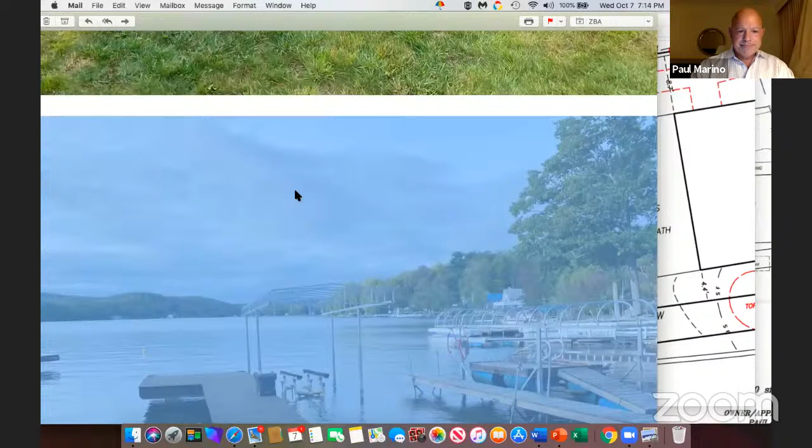Okay, this is another view. This is the dock. When we reverse the dock, we would be within the 5.5 feet in this area. And what I've done on this photo is I'm standing directly on the property line, looking out. As you can see, the neighbor's dock is...

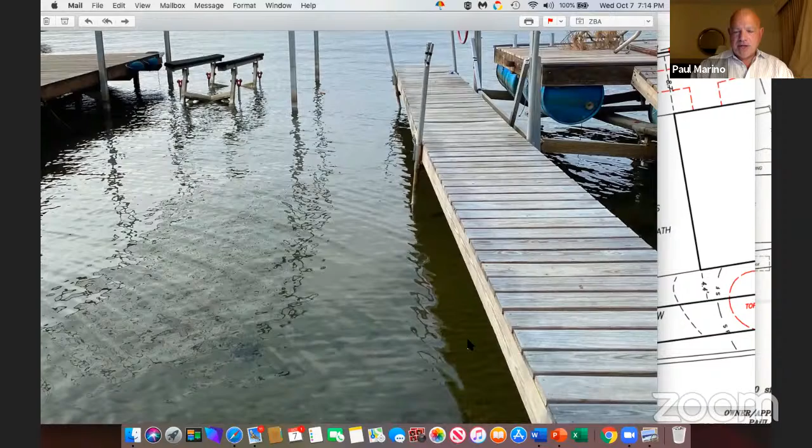Photo's blued out on us again here. Okay, as you can see, the neighbor's dock is literally on the line, has been that way for 40-some-odd years and is grandfathered in from what I understand. So with that, if he was within his 10 feet, we wouldn't be quite as on top of each other with this dock proposal as we would be.

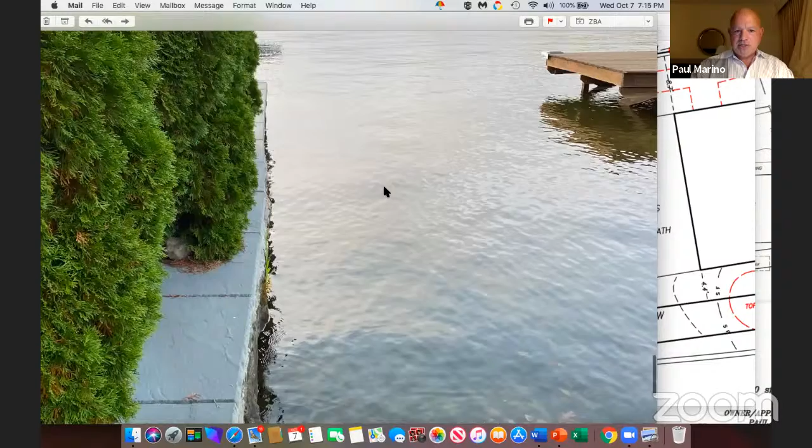And this is looking from my other property line out that direction. As you can see, there's going to be plenty of room here for the boat lift on this side. This is standing within the 5-foot section that I've leased, again kind of looking over at the dock. Not sure if those photos are helpful for you or not, but at least they'll give you some idea of what the waterfront area looks like.

In the meeting documents, we have an email from the neighbor on the side that will have the 5.5-foot littoral issue. He has voiced support for that, saying he doesn't have an issue with it, as you can see by this email that was sent to Pam this week.

So that's kind of a quick recap of the proposal. I showed you all this picture—unfortunately it's tilted, but this is looking up from the dock, again towards that 5-foot section that I have secured from the neighbor.

If you have any questions at this moment. So Paul, to clarify, you did secure a lease with the neighbor? You're doing a lease of the land? We have it, yeah, in fact I can pull that up, it's also in the documents. This was the agreement that Pam ran by the town attorney, and the town attorney has approved this for the purposes we're doing it for. I think you all have a copy of this agreement, I believe.

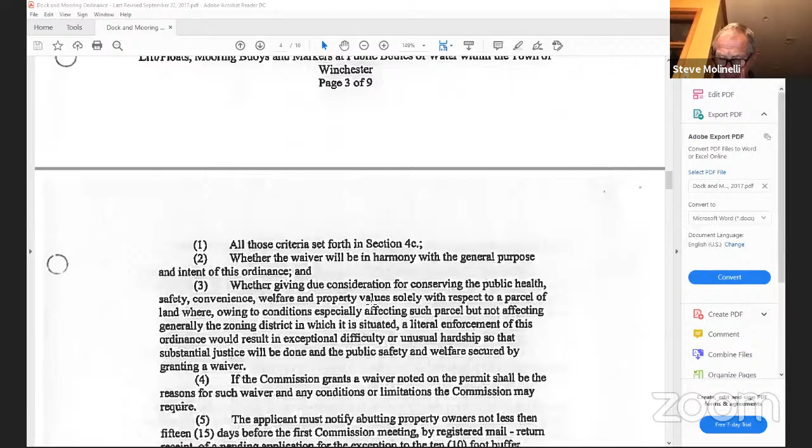And Pam, this is the ordinance we're looking at, or? Yes. So it's E. And what page is that on? That's not it, 3 of 9. I'm sorry, 4, go to page 4. Oh, I thought I saw E there. I was starting to read it, but no, it's 5, E. E5. I thought I saw 3 too, so. Where is it, Pam? It's E, but you want to look at the second page, page 4 of 10. Page 4 of 10, and where is it? The top.

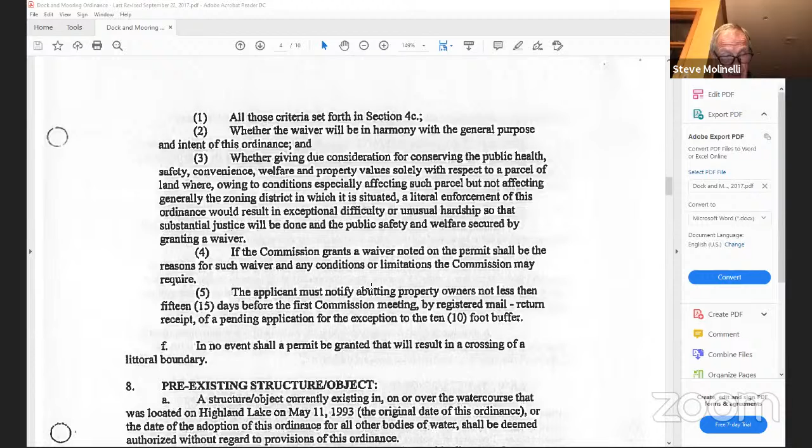So Pam, number 5 has been met. Does that make sense? Do you understand that question? Has number 5, item 5, been met? Yes, that's applicant - yeah, that's what you have to do whenever there's a public hearing. Right.

But did he make - he's not the same neighbor that mentioned that everything was okay. We haven't heard from this neighbor, right? Well, the lease agreement - Paul, if you want to speak to it, you have a lease agreement with one and an email from the other. The email is from the neighbor that would have the 5.5 feet littoral, and he said he's okay with it.

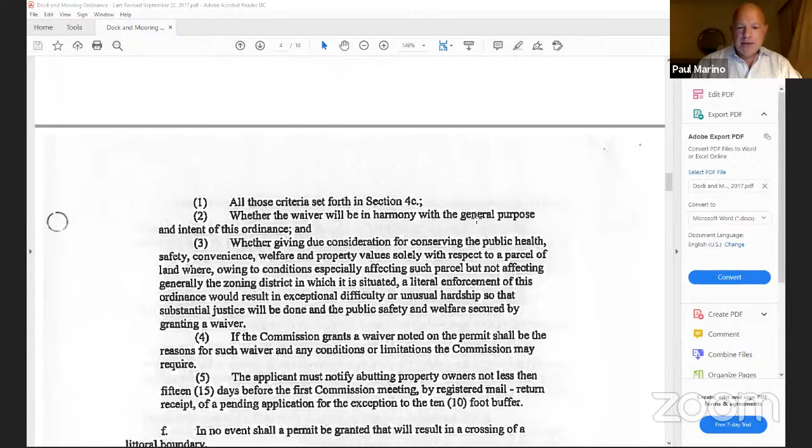Okay, and when I look at that, does it kind of go with the harmony and the general purpose of the ordinance? If you look at those pictures that I showed you, we are in a rather narrow part of the lake, or we all have fairly narrow waterfronts. And everybody, or not everybody, but there's a lot that are close to these littoral boundaries. Again, you've seen where his dock is located because he doesn't have much room on the other side.

Okay, no, I understand. I think that answers most of my questions.

Pam, yes, on page 2 of 9 of the ordinance, section C, the last section on the bottom, seems to indicate that the commission can take relevant facts into consideration in making a decision, and it includes the littoral rights of adjacent properties. So that speaks to the fact that we can rule on it and make a decision one way or the other. We're not obligated to uphold the littoral boundaries just because it's part of the ordinance. I think that's what it says.

It was always that if you had a, right, correct. These are the factors that you should consider.

Because my sense is, just to address Jackie's concern, even if the 10-foot dock were made back to just a straight walkway straight out, he would probably still be, to some extent, in the littoral boundary, not as much, but to some extent. It would be close. This section is about 5 feet, so I'd still be half a foot, give or take, within the 10.

And the neighbor is giving you permission to be there, basically. Correct. And again, he thinks it's an improvement, because right now the boat lift is over here and we're moving it to the other side, where there's more boat lift room. Looking at the picture, his boat lift is on the upside of the dock, right where you have the arrow circling there, yeah. Okay, you can see it.

You can certainly see it in this photo. He's got his dock on there now for the winter. Interestingly enough, his float goes out, and when his float is on, he goes out way past my dock, over the littoral boundary, and that's just the way it's been for 40 years. What you don't see in John's drawing is when his float is on, it's way out here, and it actually probably comes over to about here, which would never be allowed.

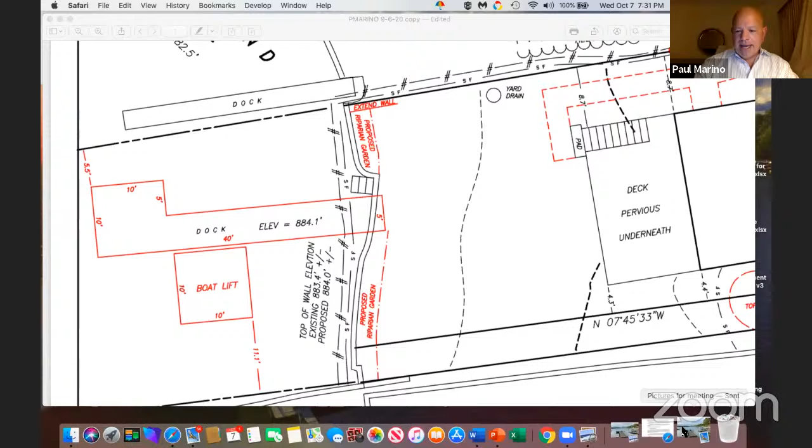Yeah, but again, I understand this was addressed prior to my buying the property, with Mike the owner, and they fought this for quite some time. Pam, you probably know the history, but he was able to keep his dock because he had pictures from the 1970s showing it was there. I think he had recently even replaced it and received approval, and I think that was when Steve Sedlowski was here. But we coexist in this situation quite well. I mean, that isn't what it's about.

I'd like to open this up to any neighbors or the public here as part of this meeting. Do we have any further questions from any of the other commissioners? Okay, well, that said, I'd like to open this public hearing up to anybody here, or any neighbors or anyone else concerned about this project or littoral boundary issues. Everyone has the ability to unmute themselves, so if you're here, you might want to speak up. Give them a couple seconds. No, I don't think so.

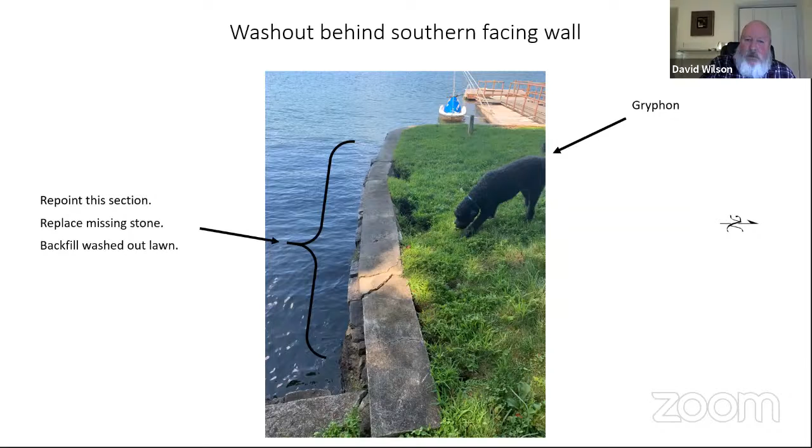So, repairs to seawall. My front lawn is disappearing into the lake. Most of the seawall is going to be repointed, other sections need to be rebuilt. So most folks have seen these pictures a couple times. What you see in this view is the section that is going to be rebuilt. The remainder of it will be repointed as necessary.

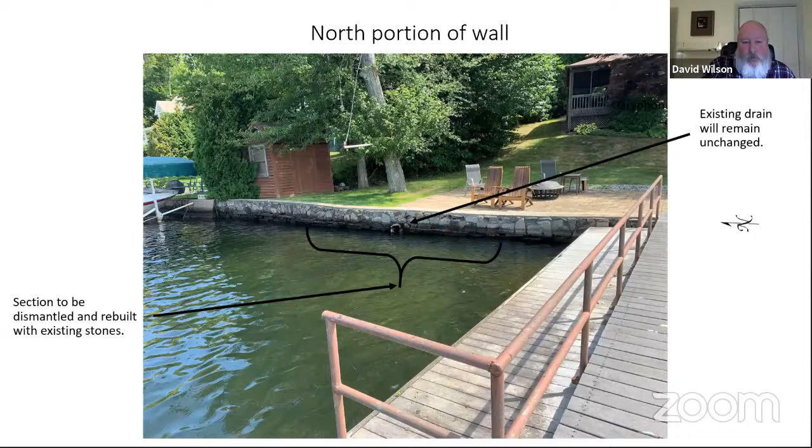The reason for the rebuild here is that the section we're pointing at right now is leaning towards the lake, and there's concern that it's going to fall in. It can't just be repointed.

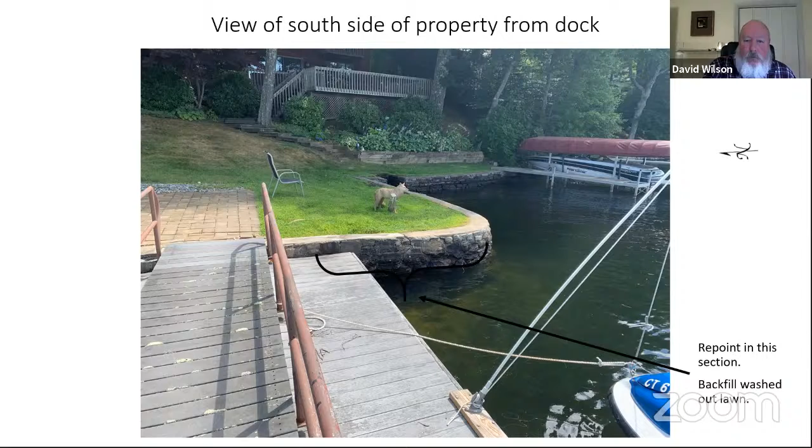In addition to that, the dock is sitting on a pier. The pier is crumbling away, allowing the dock to sink into the lake.

After I took out the seasonal floating portion of the dock, it was pretty apparent that on the left side, facing the lake, the dock is held up by two I-beams. The left I-beam is not sitting on a pier at all. It is very bouncy. The right-hand side appears to still be on stone.

So the idea is to replace the stone that has crumbled away and repoint as necessary for the pier.

This is another view of the dock showing how it is leaning into the water, roughly 8 inches or so.

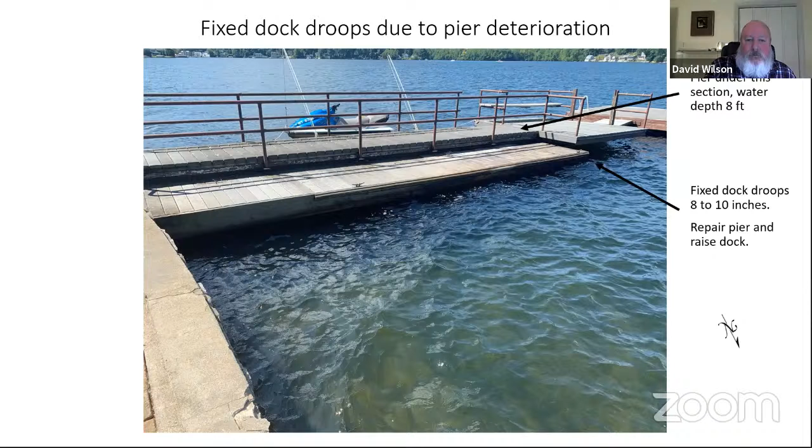It is a repair to the dock. I'm not changing it in any way. Same with the seawall—we're repairing it to its original condition.

When I looked at the dock, Dave, it appears as though there's an I-beam going across the dock from left to right, forming a T. Is that accurate? Yes, okay.

And the I-beam is sagging, basically, is what you're saying. Yeah, there are two I-beams down the central portion of the dock, extending out from the shore, and then there are I-beams that go across in multiple places. It is quite massive. We saw it.

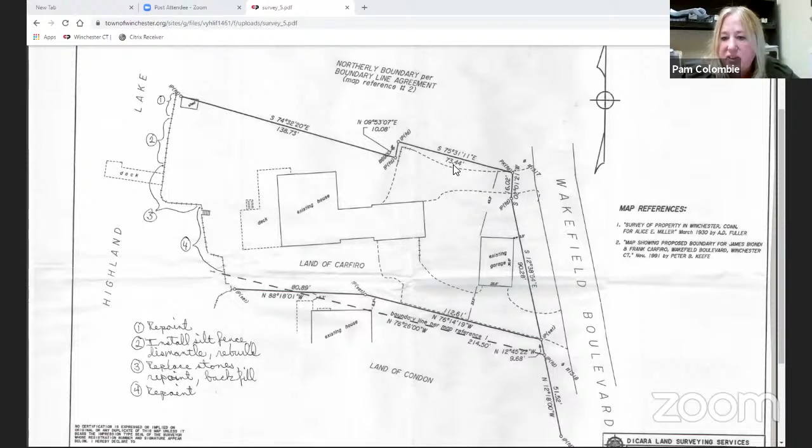When they come before you, that is the time. What was agreed upon, and where that grandfathering has come to be an understanding, is that there would be no enforcement until the time they're before you. It's been 25 years, and you can seek compliance or not. So before we argue about grandfathering, I'd like to point out a couple things.

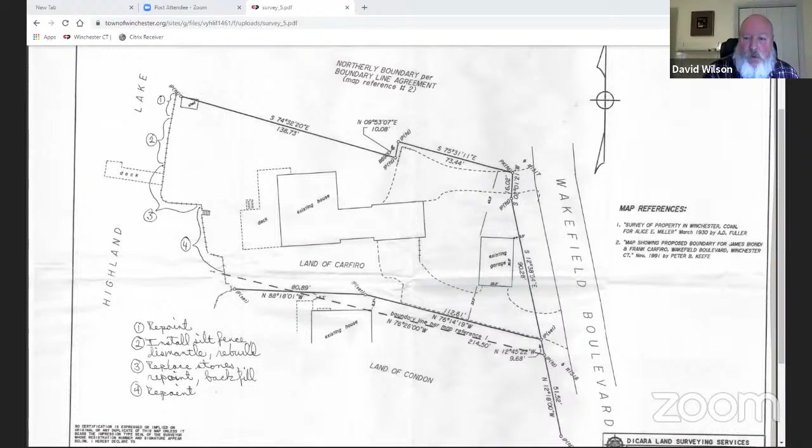This is a Shoremaster product, and Shoremaster doesn't even offer a 3-foot walkway—they start at 4 feet, and there's a good engineering reason for that. A 3-foot walkway, especially at 7.5 feet tall, is unstable and dangerous, particularly in third bay conditions where it's extremely wavy.

Is that why it has the wings on? Is that what you're saying, that it was to make it more stable? I'm not sure if I'm understanding this correctly.

Are we just talking about the 3-foot walkway that comes out over the water, correct? So this is a standard walkway adjacent to a boat lift. Okay, it hasn't been discussed at all in the past two meetings I've attended. This is a new issue that's been brought up, and I don't understand why, but it has. I'm concerned from an engineering and safety point of view that going to a 3-foot walkway is dangerous. I don't think it's appropriate in an 18-foot long walkway, 7.5 feet above ground level, to have a 3-foot width.

Well, I can't bring my 82-year-old mother out there. It's too narrow. Well, that's...

I have pulled up on the screen a question that was put before Attorney Kevin Nelligan on July 21st for this exact matter. I only bring this up now because you're talking about trying to gain compliance, and I understand there's a difference of opinion on it. Again, it's up to the commission.

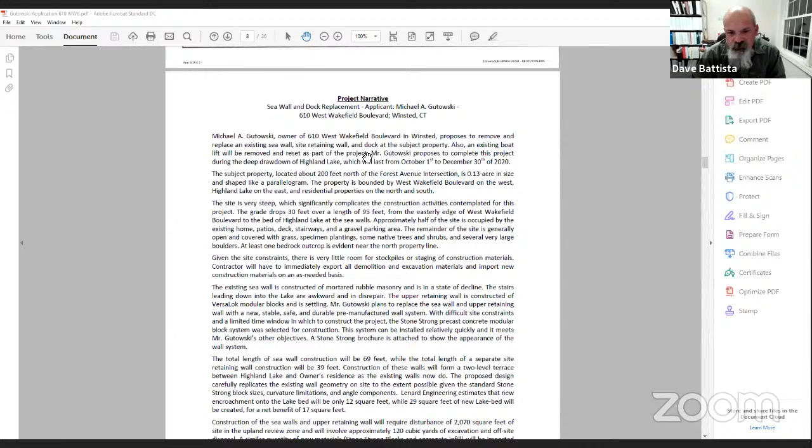Okay, so I just wanted to show you this narrative I put together on what we're proposing. I won't read it verbatim, but basically Mr. Gutowski would like to reconstruct his seawalls along the lake. There's another site retaining wall just uphill from the seawall that he would like to rebuild. He'd like to replace his dock with a brand new dock and reset an existing boat lift. We'll get into all that detail.

This particular property at 610 West Wakefield is located about 200 feet north of Forest Avenue. It's on a very steep lot that drops down from the boulevard to the lake—there's about a 30-foot drop. So when you're standing on the road looking at the house, you're actually looking down at the house.

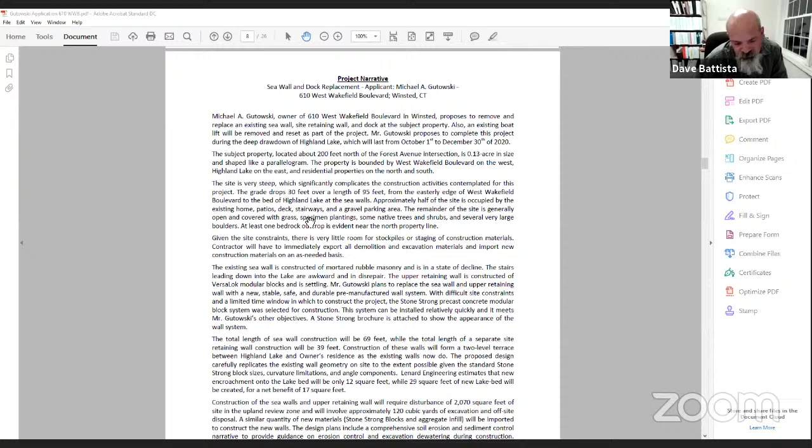It's a pretty steep site, and it's going to make construction very difficult. There's very little room to work here, so stockpiling is going to be a problem during construction. The contractor is going to have to use parking spaces and whatnot for stockpiles and staging of materials.

The existing seawalls are rubble masonry. I'll show you a picture in a moment. The upper retaining wall is a VersaLok, or modular concrete block wall, and it's not in very good condition. Neither is the seawall — it's sort of leaning and starting to fall apart, and he would like to replace them.

We are proposing to use a modular concrete block system called Stone Strong. I've included a lot of information on that in the application, and I'll show you some pictures. The benefit of using a system like this is it can be constructed fairly quickly, and as you know, we have a limited window to work here. It can also be constructed in cold weather, whereas cold weather may impact concrete if you were going to use that kind of product.

The other engineers I worked with on this project included a geotechnical, or soil, engineer that we brought in to help with the design of this system. He recommended Stone Strong, and we looked into it and thought it made a good product for this application.

The total seawall length is 69 feet — I will show you plans in a little while. The upper retaining wall is 39 feet long. Together, these walls form a terrace, a two-level terrace stepping up from the lake. The design I will show you carefully replicates the existing wall geometry as closely as we could with the components available through Stone Strong.

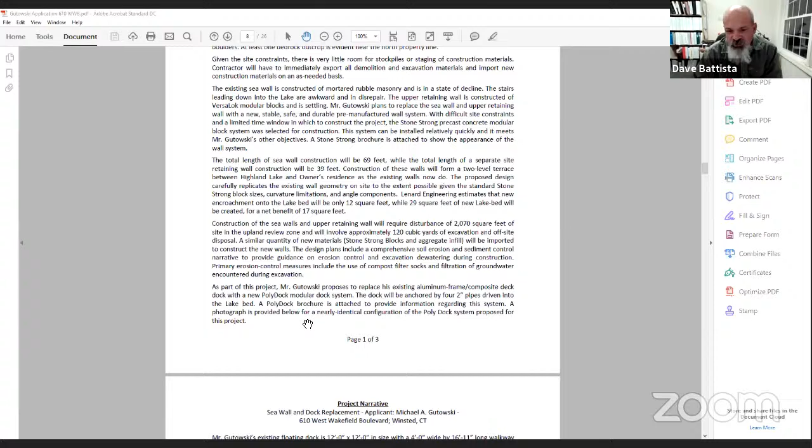About 2,070 square feet of site will be disturbed in the upland review zone. The work will require approximately 120 cubic yards of excavation. That material is going to have to leave fairly quickly — there's nowhere to put it on the site. And the new materials will have to be constructed and placed pretty much as soon as they arrive because of the lack of working space.

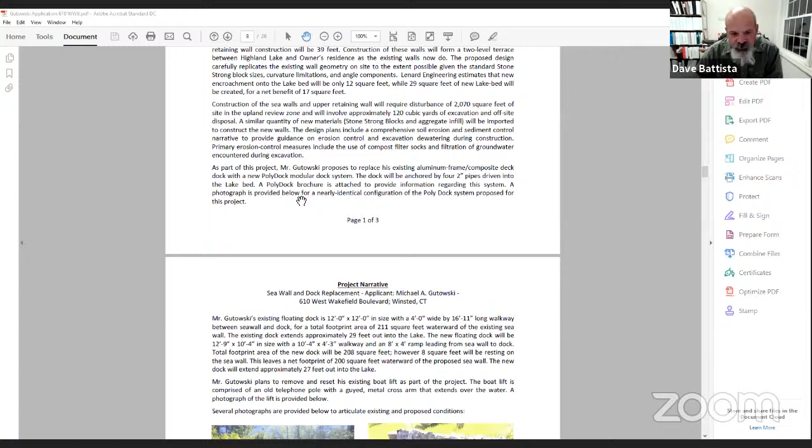Pam encouraged us to come up with a proposal for the dock to get it registered, and Mr. Gutowski would like to replace the dock with a new system called PolyDock. I attached a brochure to the application. His existing dock is 12 by 12, a floating dock that sits out in the lake, with a 16-foot, 11-inch long walkway that's 4 feet wide going from the retaining wall out to the dock.

That will be replaced by a slightly smaller dock system, 12-foot 9-inch wide by 10-foot 4-inch long, with a 10-foot 4 walkway by 4-foot 3, and an 8 by 4 ramp leading from the seawall to the dock. The footprint area of the new dock would be 208 square feet; however, 8 square feet of that will rest on the seawall, leaving a 200 square foot area over the water. The new dock will be 27 feet out into the lake at its furthest point, whereas the old dock is 29 feet out — so everything's getting a little smaller and coming in closer to the lake.

I've provided some pictures. The first one, on the upper left, is a view looking from the lake area up toward West Wakefield Boulevard. It's a very steep slope. This object you see here is the grinder pump, the sewage pump.

This is one of the two seawalls in question. It's kind of bulging — you can see it here. It looks to me to be somewhat thin in cross section, too dainty for the service duty at hand here. The wall we will be replacing it with is much more robust and more likely to stand up over a long period of time.

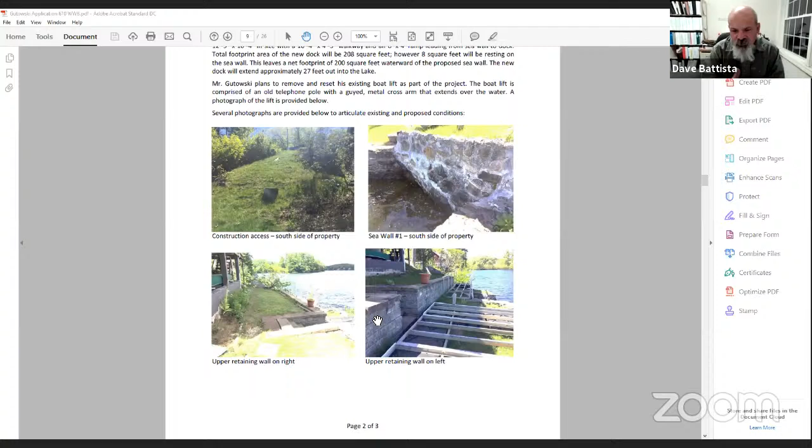The lower two pictures are the upper retaining wall made of VersaLok. If you were to look at this wall on site, it's kind of wavy and settling in places, and Mr. Gutowski would like to replace this at the same time.

This is another view of the seawall. You can see how thin it is. This particular wall is about 6 feet tall and only about 1.5 feet wide, so it's very thin and it's bulging—you can see a bulge right here. So it's time to go.

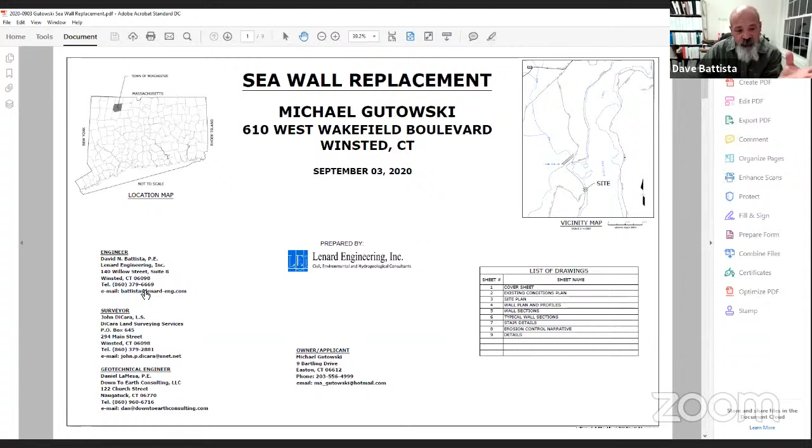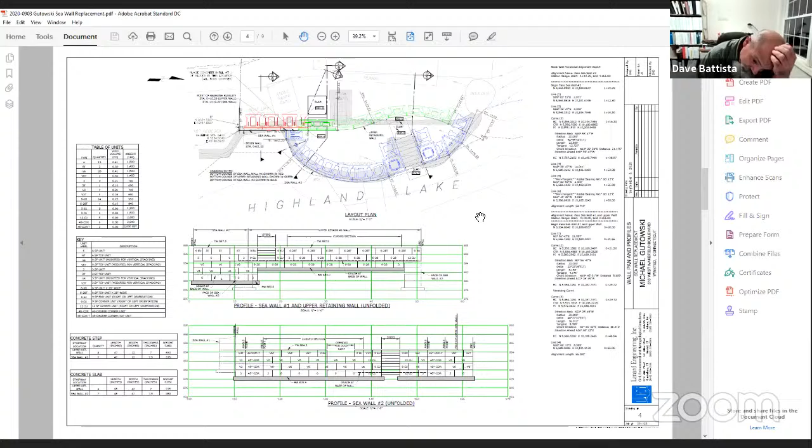Moving on, this drawing is more of a construction drawing, but it shows the thought we had to put into this. There's a lot of geometry involved so the wall goes together exactly the way we want. All the information on the right is survey information telling the contractor exactly where he has to put the various bending points and whatnot. If the contractor gets this staked out and pays attention to the stakes, the wall will go in exactly like we want it to.

I've drawn every block here for the contractor so he can see how they fit together and where they curve, and where the curves end and the flat or straight tangent runs begin. These views down here are elevation views, as if you were looking at the wall from the lake. We pretty much had to draw every block to make sure it all fit in between a boulder on the right and a seawall on his neighbor, Mr. Gutowski's neighbor's property over here. So everything fits nicely and should go in if staked out properly.

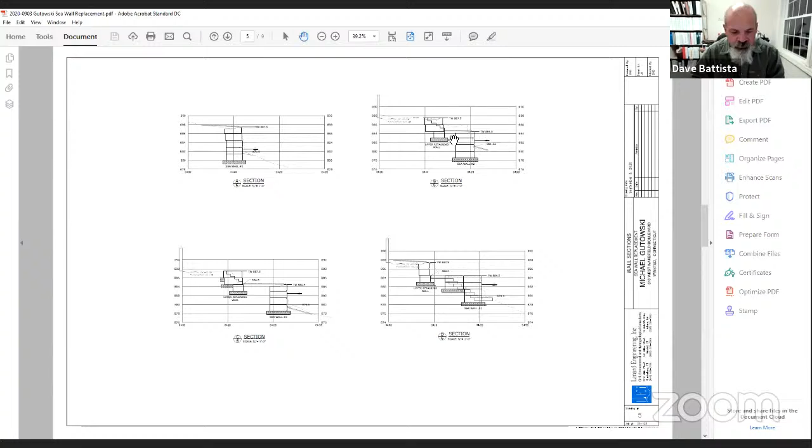One of the things I wanted to point out in this detail up here and the one in the lower left side, these are Mr. Gutowski's foundations for the lake side of his house. They do not go down in the ground very deeply. One of the reasons we brought in a soil engineer to consult with us is because we have to dig big holes where these walls are being constructed, and we wanted to make sure the front of the house wouldn't cave in as we dug for construction of these walls. The soil engineer cleared those issues.

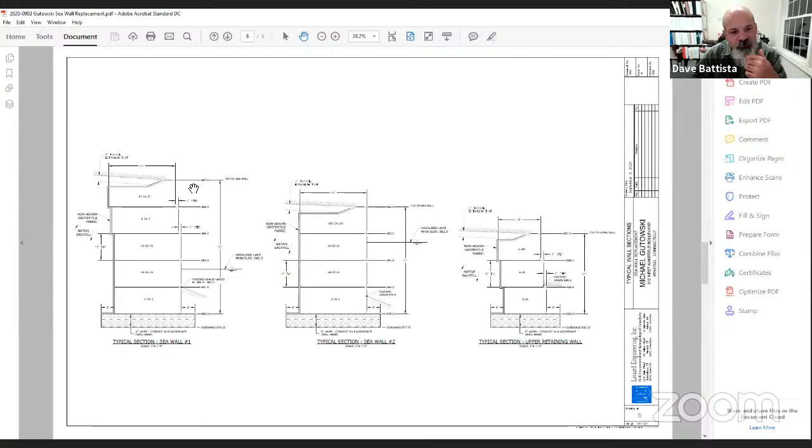These are just simply standard typical cross sections so the contractor knows exactly what elevation to excavate to. We show subgrade elevations for the various types of walls, and the elevation for the top of each layer going up. You can see how this lip is formed on the upper block to allow you to put topsoil right up almost to the edge of the wall.

Things will go much more slowly than they would if the contractor had all kinds of room. Because we have to move material out almost as it's being excavated and bring stuff in almost as soon as it's delivered to the site, it makes the contractor work with no elbow room whatsoever. So I'm expecting it to go slower than normal. I think it will go faster than 5 weeks, but we have weather factors and material availability factors to deal with, so I showed a 5-week sequence. As I mentioned earlier, the wall basically has to be built from the north end back toward the south end so the contractor doesn't paint himself into a corner.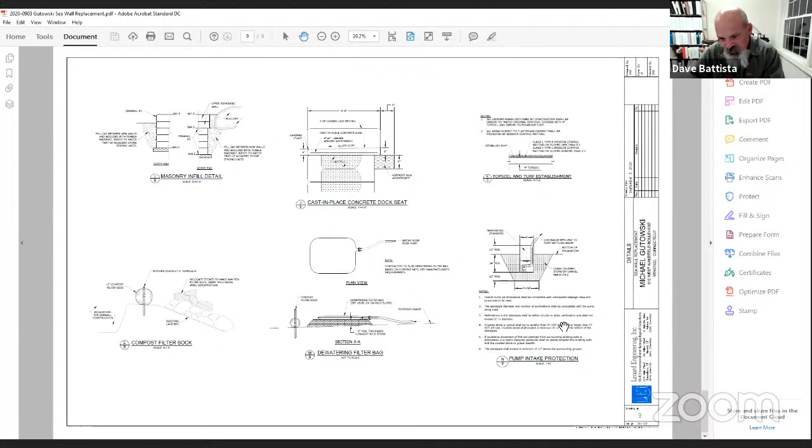At the ends of these concrete block walls, we'll have to fill in the gaps where our concrete blocks end and the boulder, or Mr. Gutowski's southerly neighbor's retaining wall or seawall starts. We'll fill that in with mortared stone built by a mason. I also show details here for pump intake protection in case the contractor has to dewater the excavation.

If we have to bring it back up, we can, just end screening and sharing. I'll do it for you. Okay good. And I apologize for going through that so quickly, but I know there are other applications, and I'll answer any questions you have.

But there's no material being stored on site, correct? Well, very little — I don't want to say no material. For example, when the blocks come on a big tractor trailer, the contractor will have to take them off fairly quickly; you're not going to be able to tie up a truck all day. Yeah, I was more thinking of soil being removed and stockpiled. The contractor may have to make small piles while digging and then have another machine come get those piles and get them out of there. There's just no room for big stockpiles here.

What were you thinking as far as tonnage of material removed? Do you have a rough estimate? How many tons of material do you think would have to come out of there? Well, I estimated 120 cubic yards of material. So depending on the material, that's probably at least 100 tons, correct? Well, probably a little bit more than that, probably 150. Okay, so you're rounding up from that. Yeah, okay.

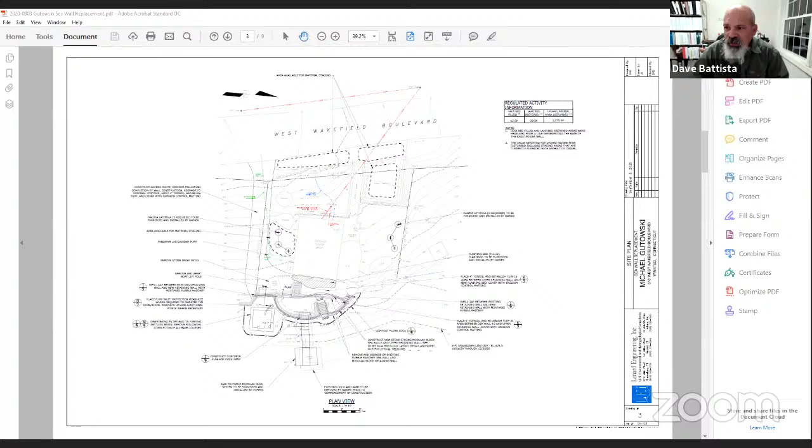Let's just go to the plans for a second. If you focus on the area of the docks, in light gray is the existing dock, called out with an arrow pointing to it, and in darker pen is the proposed dock. You can see graphically that the proposal is slightly smaller than the existing and a little bit closer to the shore when we get done. So I'm going to close that out and go back to the application.

Find it. Where we proposed. Go to your application, Dave. Yes, I just have to find it in my screens here. I don't know, it's towards the end. It's like the second. Yeah. Struggling to find it.

Well, you all have the applications in front of you, right? Yep. So the long and short of it is that the float at the end of the dock can't be wider than 10 feet to be in compliance, and the floating dock has to be 10 by 15 or less, maximum 10 by 15. No, the float at the end and the swim float, I think they can be up to 12 by 12.

Really? I'm looking at the ordinance now. Maximum dimensions for non-inflatable swim float are 10 by 10. Right, oh yeah, sorry, 10 by 10. Sorry, I was looking at the circular.

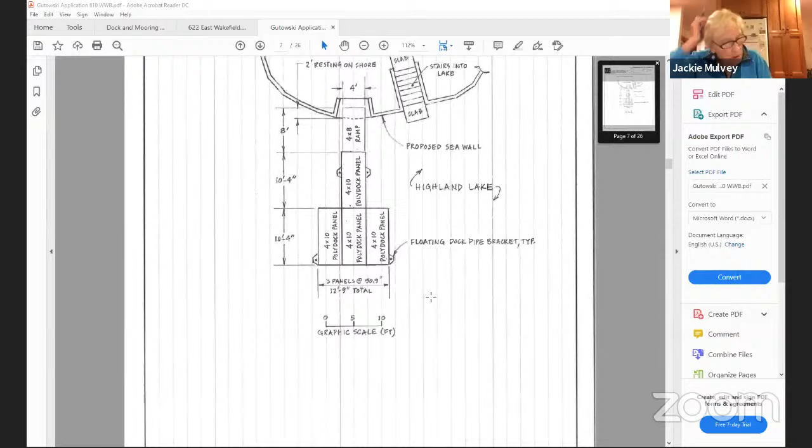So just quickly, what size does this dock need? The floating end part of it can't be bigger than 10 by 10? No, it can be up to 12 by 12 if I'm not mistaken. No, she just looked it up. Okay, I'm sorry, so you're saying that it is in compliance correctly?

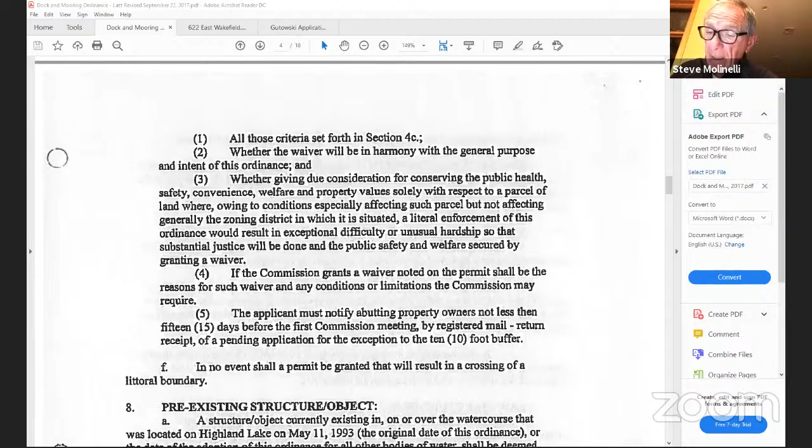I'm not sure, only because on page 5 of 10, maybe there's more to it, but: B, top of the page, the maximum total square footage of surface area for a dock shall be 320 square feet, maximum length 40 feet extended perpendicular from the shorefront, maximum width of a dock at any point into the watercourse shall be 10 feet measured parallel to the shoreline.

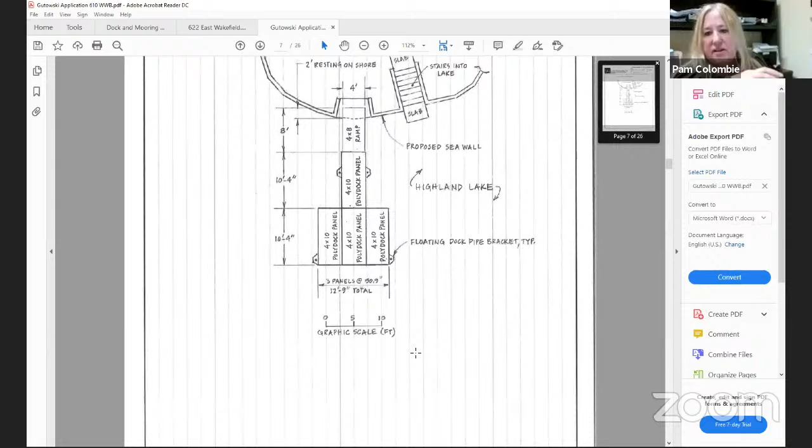So it seems like it's a width issue then. The length is fine going up, but it's a width issue, that 12'9" total. Yeah, really should be 10 feet. That's correct. I think what everyone does is that platform at the end of their dock, they call it a swim platform. Well, swim platforms are only 10 by 10 also.

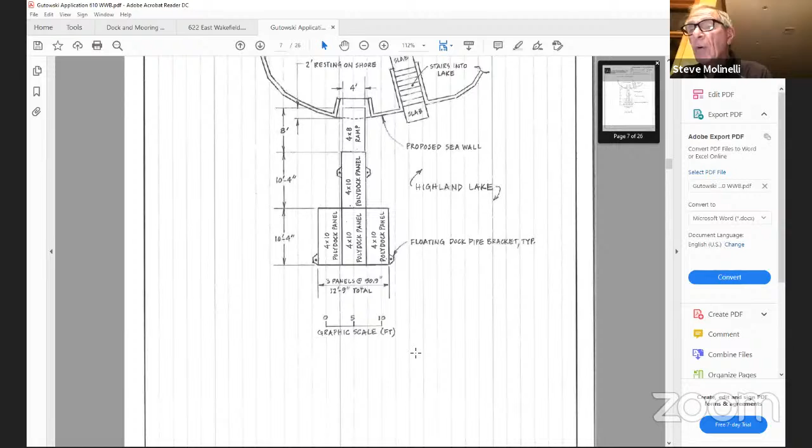My sense is, if the ordinance is what it is, the homeowner, I don't see making a big issue out of the width of that T at the end of the dock. Am I correct? Well, I mean, it's a new dock, so it should comply. It's got to comply. Yeah.

So are we in agreement that the end of the floating dock should really only be, according to ordinances, 10 by 10 maximum? Well, the width has to be 10, according to the ordinance. Yeah, the length could be longer as long as the total length between the ramp and the float doesn't exceed 40 feet. Right.

The width parallel to the land. The float, well if it's attached, it's part of the dock. Yes, but that affects the length, right? So right now, the length that they're proposing of the entire dock is 28 feet, that's okay.

It's the width that's 2 feet too wide, so they have to reduce that by 2 feet, almost 3 feet. The end of the platform can be switched around, so the 10-foot width could be side to side, and the 12-foot could go out further into the lake by another 2 feet, because the dock is modular, so it's how it's manufactured.

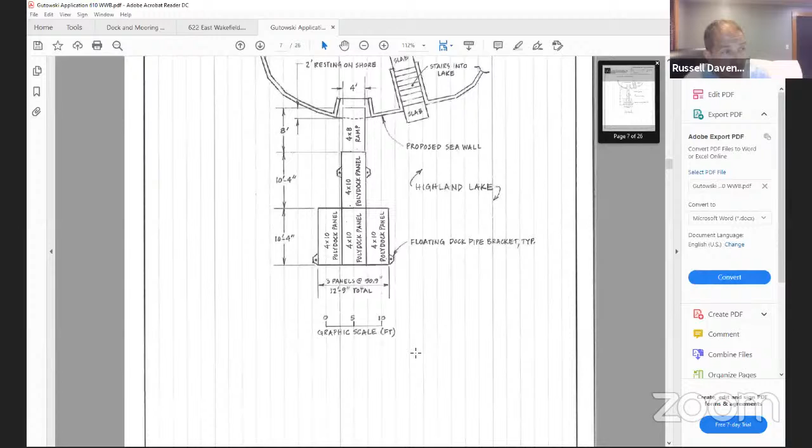Well, is it a dock or is it a float? Well, it doesn't matter, it's attached to it, so I think we're considering it a dock, correct? Well Jackie, he's asking for both. He's asking for a dock and he's asking for a swim float. Right, okay, but we're looking at the dock. Correct. And if a dock can only be, how wide can a dock be? 10 feet? Correct. Okay.

So if we turn this 90 degrees, it would be 10 feet 4 inches parallel to the shore, which is 4 inches in excess of your ordinance.

Right, the polydock system offers a 3 by 10 panel. So if you had 3 of those 3-foot panels, it would be slightly less than 10 feet when you look at the actual dimensions. Well, or you could have 4 of them and spin it and give him what he's looking for, which would be 12 by 10.

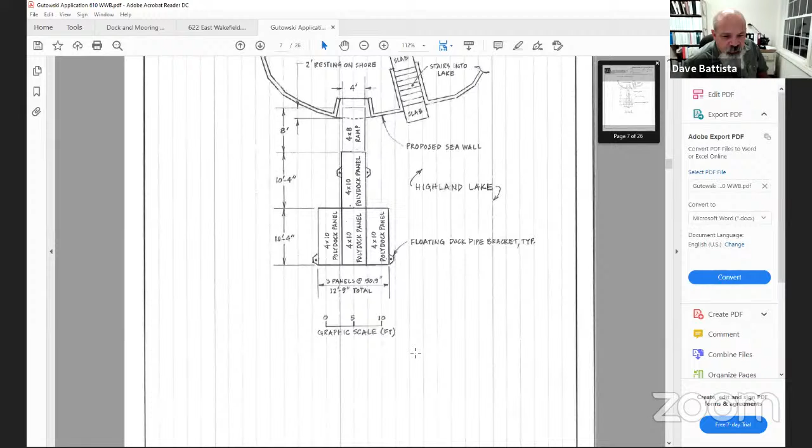So we were coming back on the 21st anyway. Can we revise this detail? Yeah, for sure. Okay, I mean it seems like it has to be done, but it almost seems quaint in comparison to the rest of the job. Well, we might as well get it correct now.

My suggestion would be, any configuration you're thinking of in order to expedite approval or us making a decision next month and not holding up the project, is to sit down with Pam and run by what your proposal is. If he submits the proposal to you ahead of time, I'll get that to you, and then we don't waste time at the meeting talking about it again. I think this is a quick fix, just spin it around and add another one to it if you're using the 3-footer, so you have 12, and it keeps it a pretty good size and you're done. It's just got to be on the application, that's all.

Can I ask a question about the Stone Strong systems? Do you guys know if anyone else has used this at the lake before for this purpose? I do not know. I know they're used extensively throughout the state, but I don't know of any directly at Highland Lake for this purpose, to basically be a retaining wall at the edge of land. Lippincott did, Jeff, Lippincott did.

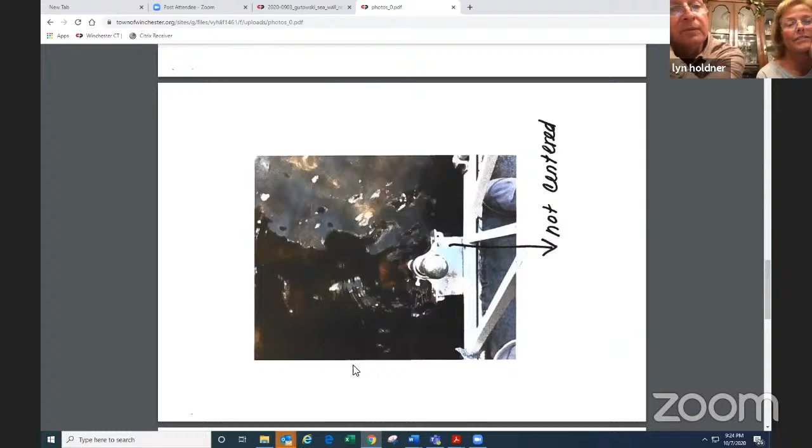Yeah, those are the pictures you're looking at now. You're looking down, standing on the runway, seeing how much the dock is out of alignment. It's up tight on one side, and it's not centered on the plate between the two vertical poles.

And we're also looking to apply to basically register this dock as essentially is, correct? Exactly. We never knew because the house was handed down from generation to generation. We never knew that even a dock had to be registered. So it was Pam's suggestion that while we were going for this approval, that we register the dock.

Guys, I think I need to recuse myself from this one because these folks are pretty close family friends of mine. Sorry, I'm gonna. No, that's fine. That's the right decision. Okay. Yeah.

I don't know, can we just approve this? I mean, we're talking about moving a block over.

Say that again, Pam? I'm sorry, I couldn't hear you. Yes, I mean, tonight we do have to find it as not significant activity, and you can approve it. Okay, I think we should.

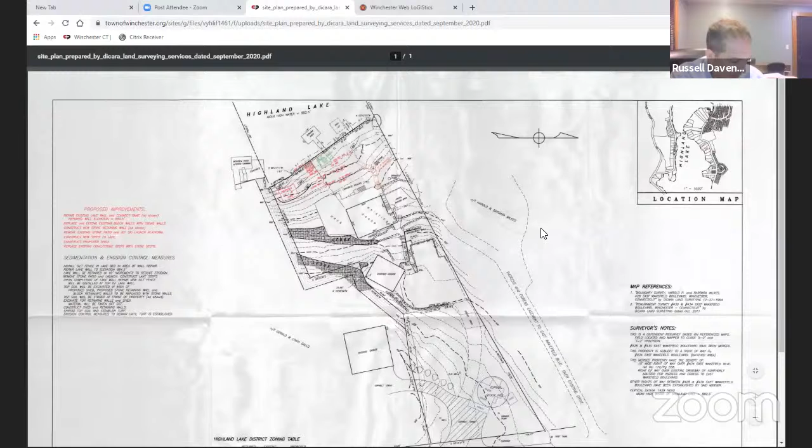The applicant is Don LaPointe, the owner Mr. Bates. It's 428 East Wakefield Boulevard, and we have a long list of repairs here: repairing a lake wall, jet ski launch, remove lakefront stone patio and replace with lawn, repair lake steps leading to water, remove 2 steps of concrete stones, extend lower block retaining wall, add a shed.

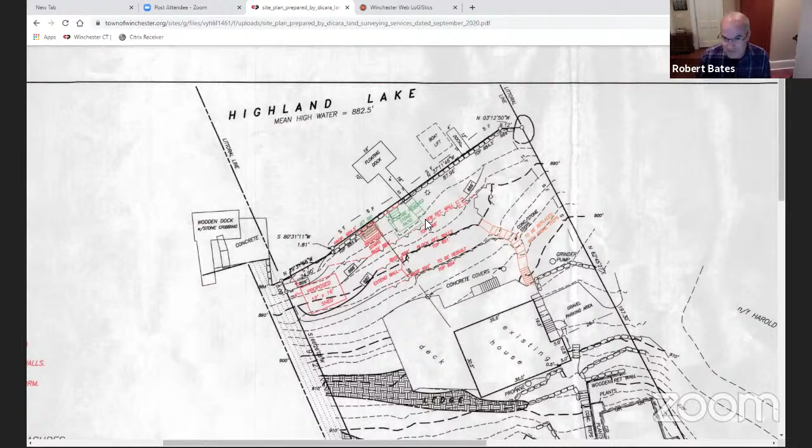There is currently what we're calling a jet ski launch. I don't know how long it's been there, it was there when we bought it. It's made of wood and concrete, and we would like to take that out. There is also an existing stone patio with some stairs going into the lake. We want to remove that stone patio, not rebuild it, not replace it, just remove it. With regard to the stairs into the lake, we do want to have some stairs into the lake. Ideally, they'd be moved over just a little bit and widened a little bit, but this is certainly something we're willing to do whatever is best according to you guys.

There's also, I see the diagram is up, some concrete and stone steps that are leading from the lake up towards the house. I think Don's father built them, but I'll let him go into that. With all due respect to Don's father, they're kind of uneven in height and they angle a little bit, so they're difficult in many respects. We just want to replace them again with stone in the same spot.

There are existing retaining walls. All we want to do is reface them. I think Don had something to do with those back in the day, and the integrity is fine. There's just some stones placed in front of them to face them, but we just want to remove and replace those stones.

Now, with respect to the retaining walls, I do have what I consider an erosion problem on both the north and south side of the property. If it would help with the elimination of silt flowing down into the lake, I will extend those walls on each side.

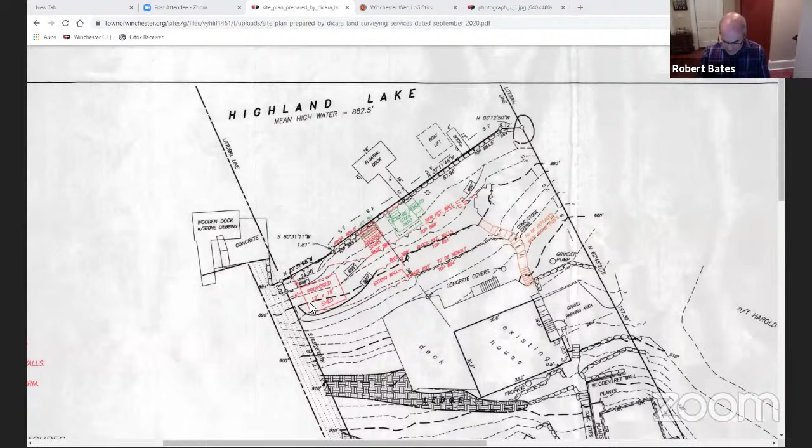Just real quick, met Don because we love it up there. Just last fall we bought the property at 430 East Wakefield. There was a condemned structure there, it was an eyesore. That's when I met Don. Don demolished it, and hoping that has helped improve the area a little bit. We have no intention of building anything up there.

I do have the cooperation of the neighbors on each side, and Don knows them as well. And that's really the overview.

What am I looking at? What did I just see that has a stockpile of soil? Can we go back to that?

This is a blueprint that was drawn up by John DiCara. I think Don can go into this with you in his discussions - that circle is over the house that was razed. I'm guessing, from what I've heard in conversations about other items on the agenda, that must have to do with whatever goes on in the course of construction. I forget the terminology you guys used, staging, or Don can tell you what's going on with the soil.

Because I can just say right now, we're going to have a topsoil pile that usually needs to have erosion control around it. That would need to be noted on this.

Don, are you there? Don, you got to unmute. Pam, can you unmute him? It's not showing that it's muted, but I can't hear him. He has to turn up the volume on his computer. We had done a test run before, so he's got the capability. I'm sure he can hear us, right? That's not your phone there, that 485 number, is it, Don? No. What I would suggest is that you call - do you want to call? Let me tell you what number to call, Don. If you want to call in on your cell phone, this way you can see. This will be quick, and in the meantime I'll share the numbers. He's showing you a number that he's calling - okay, so that is him. He held up the number for you. When you do it, because it's showing as muted and I've asked you to unmute, I think you might have to call back in. There's a menu, it'll say... Oh, it's so annoying, isn't it? He's saying call me, you can call back. Call him.

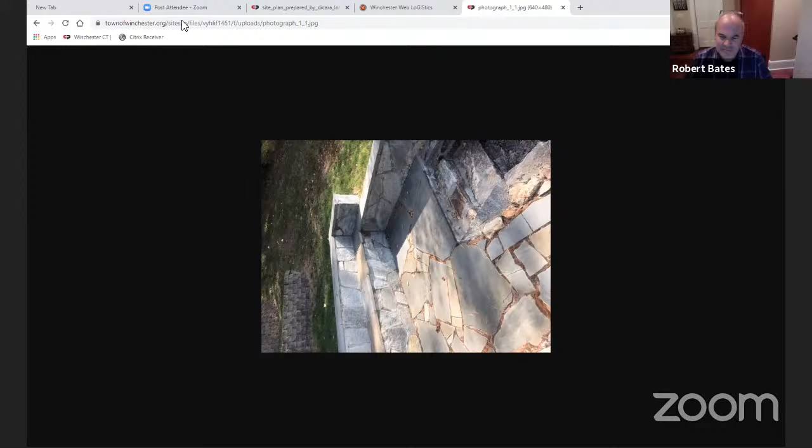And then there's... where did I go? Oh my goodness, Lord. Oh, I must have messed up. Oh, there's not that easy.

There's the step. Okay, the wooden structure you see there, it's actually got cement underneath it. That's a jet ski something or other that was there when we bought the property. We're just removing that and having grass and the seawall.

Hi Don, are you okay there? Can you hear me? Yes, yep. All right, let's go back to the site. You're supposed to hit star 6 to unmute yourself on the phone. I didn't know. Well, now you do. Now I do. Well, you know what, welcome to Zoom.

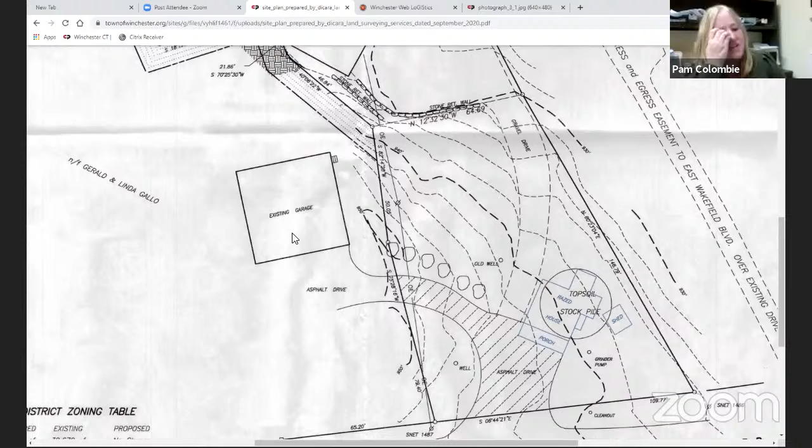Okay, so can you see the screen? So you want to guide us through this site plan? Yeah, let me, can you slide it up a little bit? I can't move it. Sure, so I'll probably, if I move it, the thing will knock me off.

But anyways, as Rob indicated, this house used to belong to my parents back in the 70s. So some of the work that was done here is all the work of my dad, who passed away about 5-6 years ago.

So anyways, the stairs that were done, if we want to talk about those first, they are not even at all. The treads are anywhere from, who knows, a foot to 4 feet. So they're very hard to walk up and down. The steps are anywhere from 6 to 9+ inches, so they're very not good. They're not safe, and take it from me, who has trouble walking downstairs. But anyways, they need to be redone, and they'll be done in a more unified, safe step and tread. They'll all be even. So that's one battle, but that's really not our foremost priority right now.

The foremost priority is to do the seawall. The seawall is falling into the lake, as the pictures I sent to Pam earlier today show. There's pieces of it that have fallen into the lake. So our job is to excavate the rocks that are falling in and get them back up on the wall.

We're not to go down to the lake bed at all. I think most of the rocks down on the bottom are good. It's probably the 2 to 3 feet from the top that are pretty much loose, not plumb at all. They're all half falling into the lake, or they're not even. They just need to be all straightened up and repointed with different rocks. And also the level of it goes up and down all over the place.

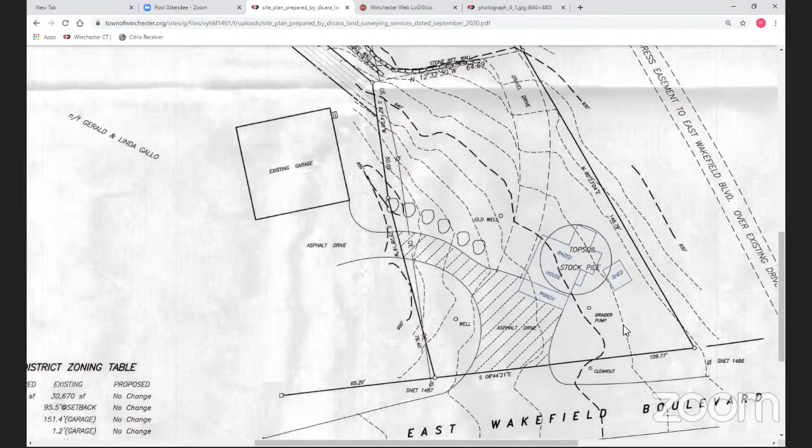So if you have any questions, I'll be glad to answer them.

One thing I'd like to see for our next meeting is more detail of these upper walls. The homeowner mentioned there was erosion occurring there, and maybe more detail of exactly what was going to be done, with the extension of the walls and potentially other erosion control methods up there - not for the site of construction erosion control, but once that wall is completed, or if they're being extended. It's hard for me to see what the scope of work is on the upper walls.

Well, most of the erosion is up top, not on the bottom. It's coming down between the Wilkes property and Rob Bates's property, because of the driveway and everything coming down that area - that's where we're getting a lot of drainage from the water. Water runs downhill, there's nothing you can do about it other than try to maintain some kind of growth. We could put bigger stone there to try to diffuse it a little bit, but the water is coming down the hill. As you can see from the topo, everything is downhill.

There is grass there now. It doesn't grow as thick as you would think it would on a nice lush lawn, but I think carrying it...

To back up a minute, those two retaining walls that are there, they were there when I did those back in the 70s - actually early 80s, I think we did those. They were made out of 6x6s. What somebody did prior to Rob Bates buying the property is they faced them with a decorative block, covering up the 6x6 timber walls with a block wall. Rob doesn't like the look of the block, and probably doesn't like the look of 6x6s either, but those walls have been there over 40 years. So I'd say what he wants to do is reface them with something with a stone look. He's trying to make it look more unified with the lake wall, trying to make the appearance look better.

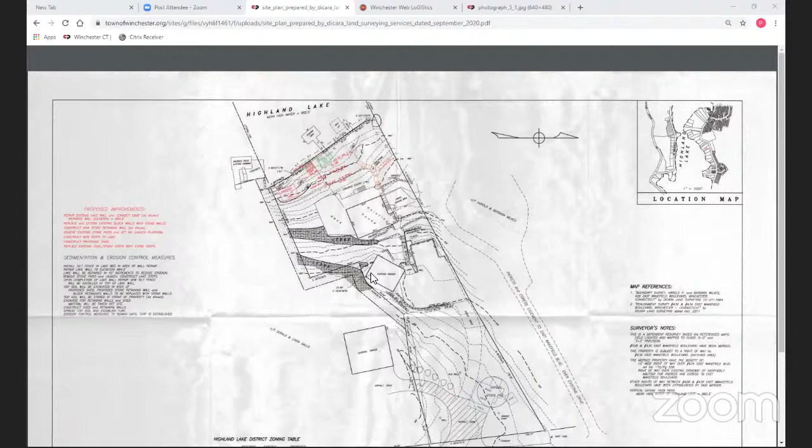And the other thing is it's very steep coming down there, so by us continuing those walls, it does allow us to have a little bit of areas so it's not so steep. It steps down a little bit, so you don't have all that steep slope going all at one time. So that's basically the main purpose of the walls - if anything, that's erosion control.

Could you repeat that? I couldn't hear you. Drawing. Where is the shed? It's here, right in the corner. Oh, there, okay, I'm looking at the wrong piece.

And we do plan on all the appropriate landscaping.

Hey, Don. Yeah. Yes, Steve.

Just to be clear, you keep saying you're only doing the lakefront wall. But if the application includes work on tiering the property and fixing the stairs, then Russ's point is we need more detail. If you want to remove that language and just repair the lakefront wall and stairs, you'll have to submit another application down the road to do what the homeowner would like with the walls.

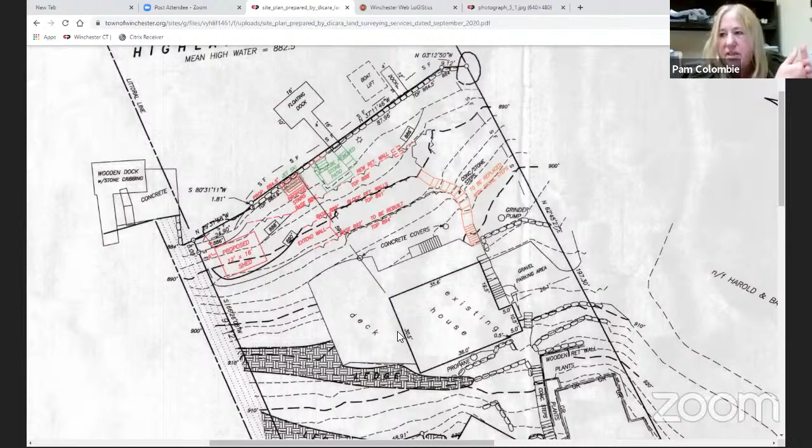But you can reface these walls without taking them out—so you've got timbers, then block, and then you're gonna put more block? No, the timbers are gonna stay there. The block will come out that's in front of it, but we'll just reface the front of the timbers with new stone.

That make sense? Sort of. I mean, like I said, we need to see a plan with more exact detail of all of these. Some of this stuff's easy, like removing the jet ski launch and the patio, but the concrete steps, the retaining wall, the moving of that, and the re-excavation around the shed—we're used to having a bit more detail, which I'm hoping you can provide for our next meeting.

What do you want, a cross section? Yeah, we want cross sections and as much detail as you can get us, so we get a really clear idea. Probably a sequence plan. Yeah, there's a sequence plan on the side of the drawing—it's all a sequence of events. John and I discussed that prior to him putting it down in the plan.

So as far as the detail for the wall, yeah, I could bring you a detail for the wall, which is not a problem—to extend the wall is what we want to do. As far as the jet ski lift, that's already pictured. Pam, did you put up that picture of the jet ski lift? Yeah, that's not an issue. I can see to take that out, and I don't need any real detail on that.

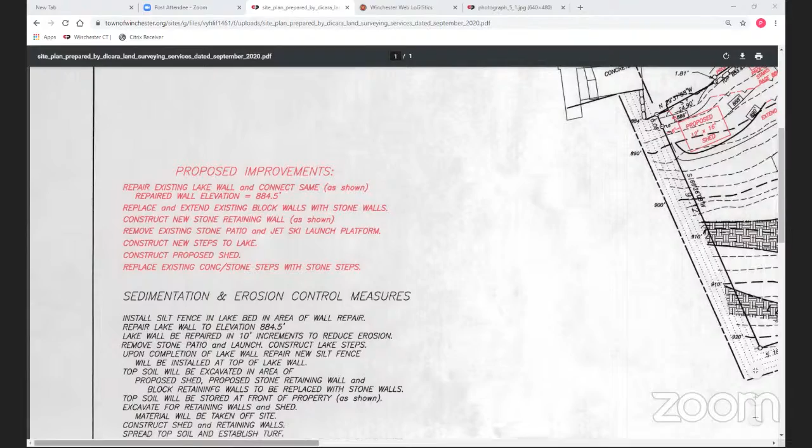Don and the homeowner, the first thing you're asking for is to repair the existing lake wall and connect a repaired wall to a different elevation, that you talked about, and replace and extend the existing block wall with a stone wall. Where is that block wall? That block wall refers to existing retaining walls on the property.

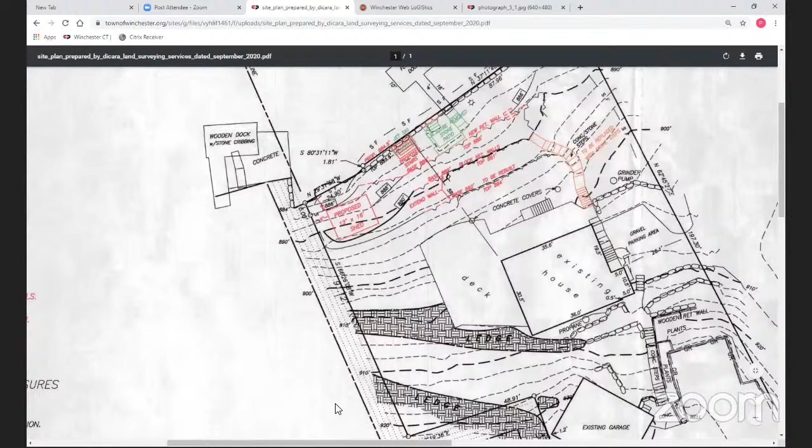Okay, that's up there, so you're doing more work than just the lake wall. Go back to the picture. Then you're going to construct a new retaining wall, and that's the extension you're talking about? Correct. Okay, can you go back again, Pam?

Remove the existing stone patio in the area we know about, construct new steps. Now, that's all in your proposal now. Right, and if you're not going to do those things, then—

I didn't say we're going to do that, Steve, that's not what I said. I said we're focusing mainly right now, but we want to get the seawall done, obviously. The rest of the stuff is probably not going to get done between now and December 1st. Well, the rest of the stuff is up from the wall, so whether you have a drawdown or not, you don't need a drawdown to do any of that work. It's all on land.

We want to do the rest of it. But what Russ is saying is we need more detail on what you want to do on the land. That's the easiest way to say it. Yeah, I got it, I understand what he's saying. So I will give him detail for the walls we propose to put on the land.

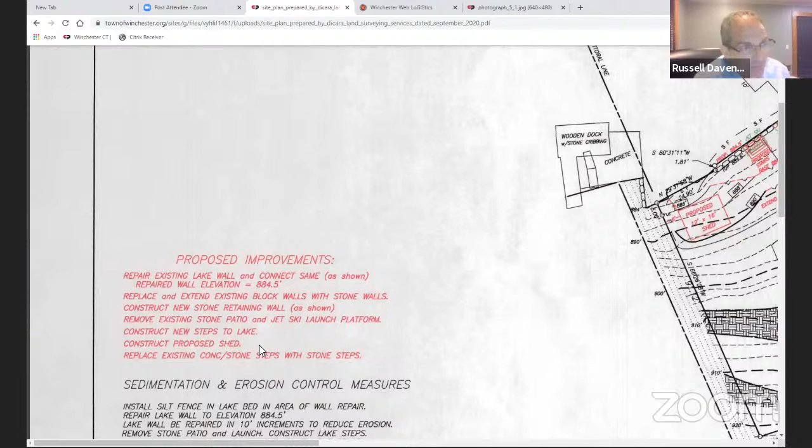Yeah, that's what Don said too, with these plans, the more we can see, the better off we are in moving ahead with an approval. Even if you don't think it's that important, the more you can add, the better off everybody is in understanding the scope of the work. I know it's more work on your end up front, but that's what we've been requiring and trying to move ahead with everybody on.

The walls are approximately 3 feet tall, not more than 32 to 36 inches. So they're not engineered walls, just more of a decorative wall holding back 3 feet of water, 3 feet of dirt or less. I'll put up some kind of cross section design for that wall and give you that for the next meeting.

Any cross section, exact measurements, lengths, more pictures would be beneficial. Okay, no problem. So if you're voting to accept this tonight, you have to find whether or not it's significant activity. I don't know if the commission's interested in visiting the site. We would. You're welcome anytime.

Thank you. I have a concern, I'd like to see a buffer zone. Say that again, Kurt—a buffer zone? The vegetation riparian buffer zone. Yeah. I didn't see that on the map, so that's the suggestion I have.

I'm sure you can elaborate on it. It's a 2-foot buffer zone. Yeah, Mr. Bates and Don have been requiring a vegetative buffer between the grassy lawn and the seawall. Okay, well, I'm looking forward to that to keep the geese off the property.

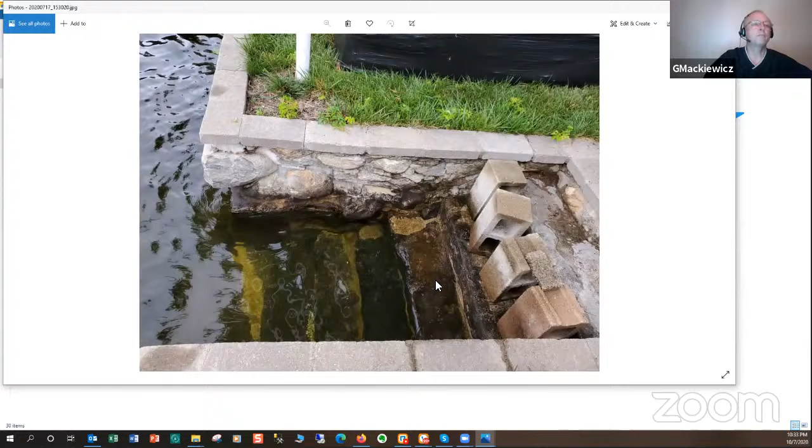So our goal is to bring the wall to more true to the lake, in a sense that right now it is field stone for probably, let's call it, 60%. The other 40% plus is that block that is, again, a landscaper block.

This picture is just showing you a cross section here, where all under this rock where the fieldstone is, it looks like rocks have been falling out of the bottom of the wall for many, many years. The rocks aren't there anymore, but it is literally undercut. And the wall has started to bulge, as you can see in a number of different areas. Specifically here, where I'm the cursor, the wall is literally falling.

This is the landscape portion, and it's about 8 inches recessed in this area because the wall is literally falling forward. There was no engineering done whatsoever behind this. Usually you have to design it with what they call a battered back, but none of that was done at the time.

In talking about the dock itself, it's a wood dock that is on a pier, and the pier, you can see from here, is in very, very good shape. The problem is that it was never built properly. This is a picture from underneath the dock, and again, this is a better picture to show the wall coming forward, and you can also see the face of the stone there.

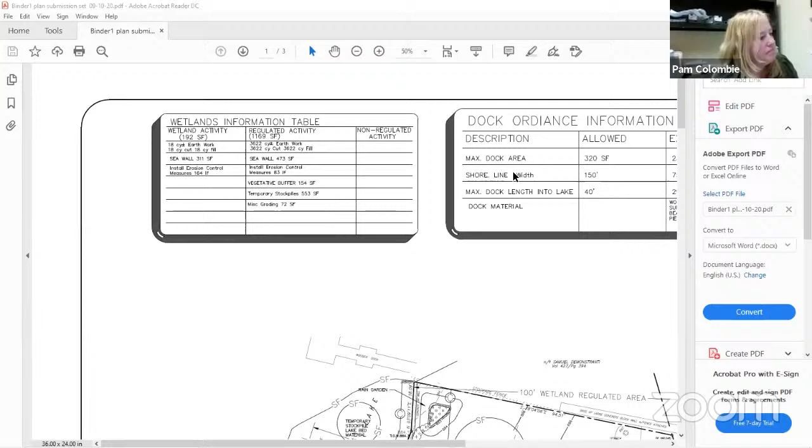Okay, on my screen now I have a wetlands information table to make your job a little easier, showing our impact in the wetlands and our impact in the regulated activity area. I also put up the dock ordinance dimensions in the other corner. Let me slide that over so you guys can see it.

So what George was trying to say is that he's allowed 320 square feet for his dock. His existing dock was 235; the proposed one will be 264, a little bit bigger. His shoreline width is 75 feet, and the maximum dock length into the lake allowed is 40. What he presently has is 29.4, and he asked us for a 40-foot long dock, but we couldn't do that without getting the diving board effect. We increased the beam size from 3.5 inches to 8 inches to give him a more stable platform out there.

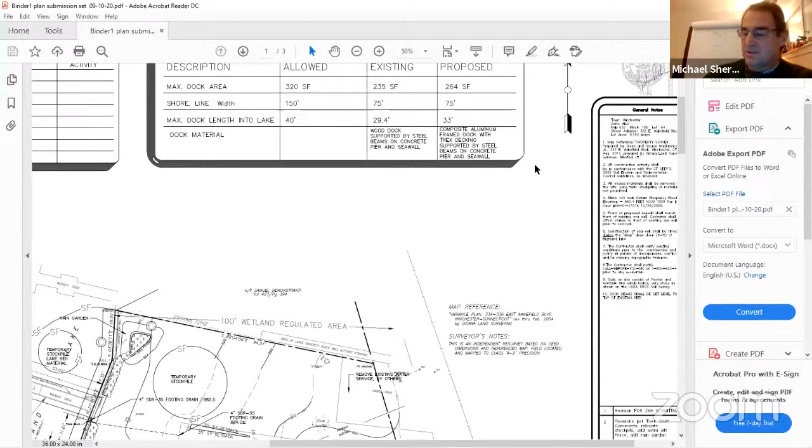When we went to design these beams, that was a bit of a challenge — it's basically designing a bridge. So we had to adjust the seawall to form a small abutment, which we call a dock abutment. That's in our details in the sheets below. Here's an elevation view of the dock abutment.

Right here is where the dock will sit into the wall. We have the 8 inches for the beam, and that framing and decking for the aluminum deck was another 4 inches. So George will have one step down off the back of his wall into his dock, and he'll now have an even dock. And we have another elevation view showing the dock going out into the water.

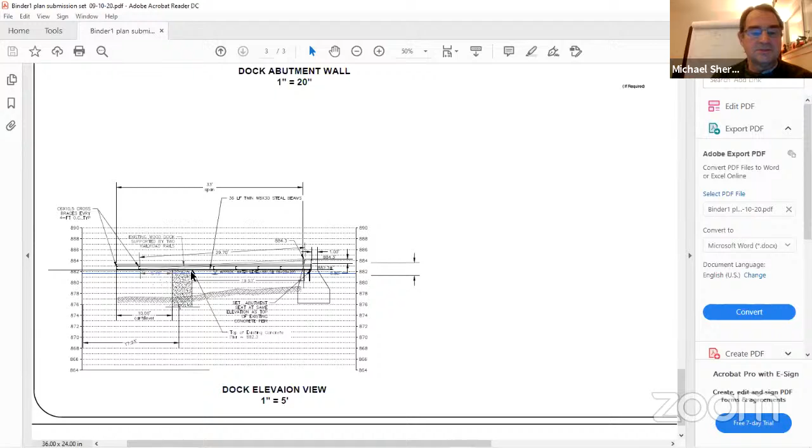Here's the existing 4x4 pier, and we will be sliding these beams over here. When you do a bridge design and you have beams, you have to plan for thermal expansion and contraction of the beam, so you have a fixed end and a loose end. The loose end will be over on the pier, and we'll have to make modifications to the existing pier by adding a keeper block to the top. It'll be basically a block of concrete in between the two beams, so if something hit the dock from the side, that would keep the beams on top of the pier and they wouldn't slide off.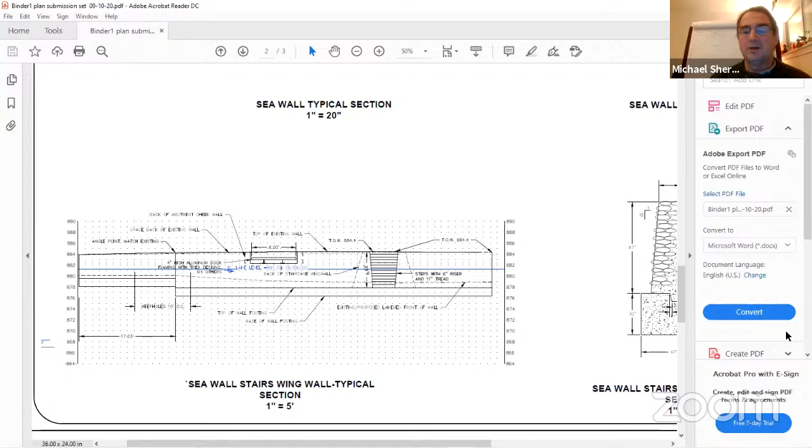This cross section here is for the seawall at the abutment. The retaining wall that we put in is based on a gravity wall, and so we have a wide batter in the back that'll keep the soil pressure pushing down on the wall. And then we have the gravity of all the massive concrete and stone here that will keep it from sliding out into the lake. The existing wall right now had too thin of a section and it's turning over, and so I designed this wall to meet Brian Dwyer's concept of how he wanted to build his stone retaining wall.

This is all to be mortared stone in the front, and Brian could explain this to you best - he has some pictures of how he did this before. What he likes to do is make the stone masonry wall, then fill the core with concrete. All we're asking Brian to do is keep to these dimensions, because we know that for a concrete retaining gravity wall, this will be stable and it will last George's lifetime, that's for sure. We won't be back doing this again.

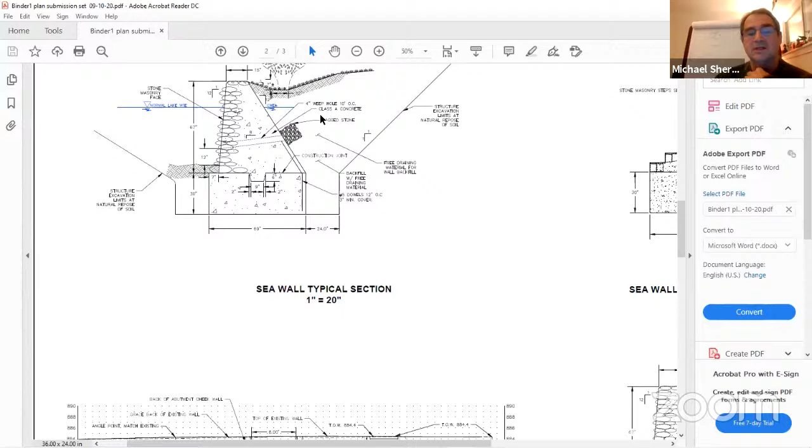We've given you several cross sections through here. We want to rebuild the steps, and I have a cross section of the steps to show that. If I can get it to hold there for a second... there we go, I have a little trouble with my screen here.

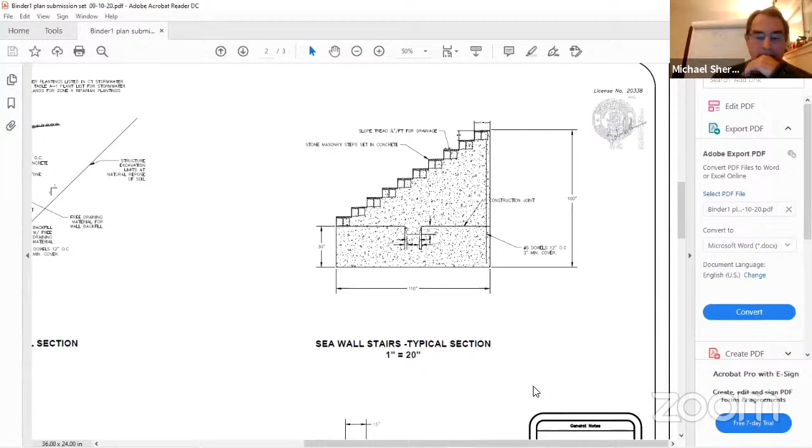The steps are going to be done in the same manner as the wall, with all stone masonry going up the steps with a concrete base underneath it. I'd like Brian to discuss how he's going to build the wall, and he can give you the sequence of construction.

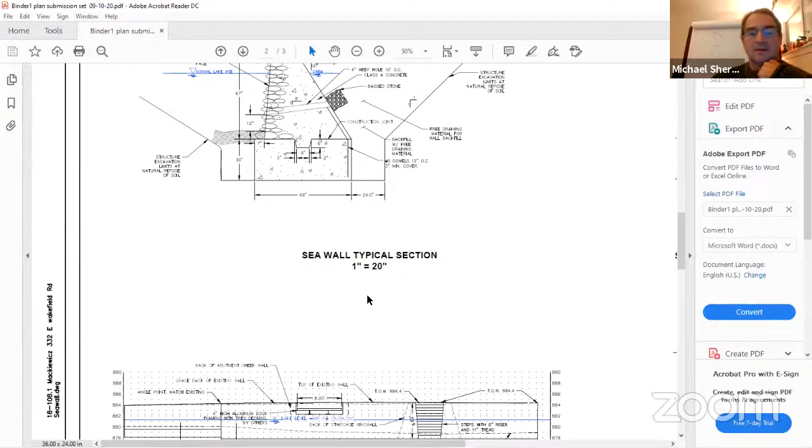If you're still here, Brian. I don't know if we're still here. Past his bedtime, we're still here. Okay, hi Brian, how you doing, Mike? Good, I hope everybody's doing well out there, and thank you so much for staying up with us.

Just to expand on Mike's points, it won't be totally concrete. We're going to be lining this with 8-inch masonry blocks, cementitious masonry units that are rated for foundations and below grade applications. We'll be using masonry cement type S as well as bagged concrete coming in at 5,000 PSI, and we'll be filling the core with rubble and concrete, and there will be rebar involved.

That rebar will probably have to be coated, right, Mike? I would imagine for rust purposes. Anytime you use rebar in a marine environment, you should use epoxy coated.

Yeah, absolutely, I agree. So we noted that there's the landscape block wall on the northern side of the property, and we'd start our excavation there and do it in 15 or 20 foot sections, replace that, take down the next part, replace that, after all the silt fences and all that, of course, and work it down like that.

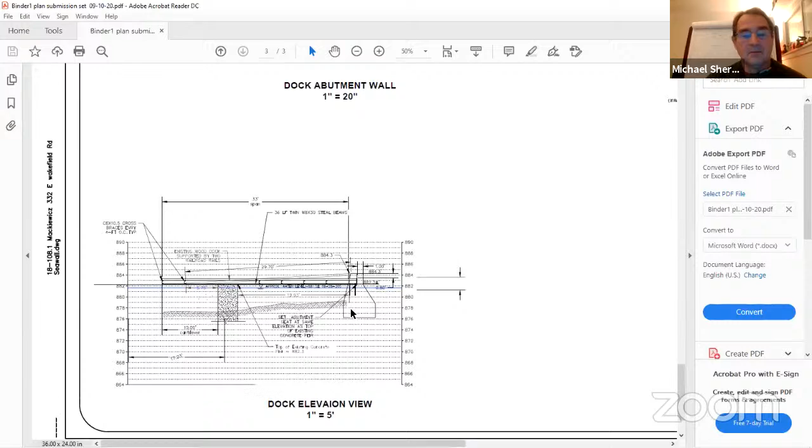Oh, I did want to mention dewatering. Yep, because the foundation we show, the wall is only 30 inches below. If we go over to my cross section here, with the 8-foot drawdown, I believe the water level will be below your excavation and we won't need it. But if we do need it, we will just follow all the guidelines in the sediment erosion control basin with pump inlet and outlet protection for it.

The outlet protection consists of a 55-gallon drum with holes in it. You put the pump into that, and then you surround it with 1-inch crushed stone, which will dissipate the velocity of the water coming out of the basin. The barrel will just have holes punched in the side of it. And then you allow that to run over the grassy area, and that'll give you water that has no turbidity in it.

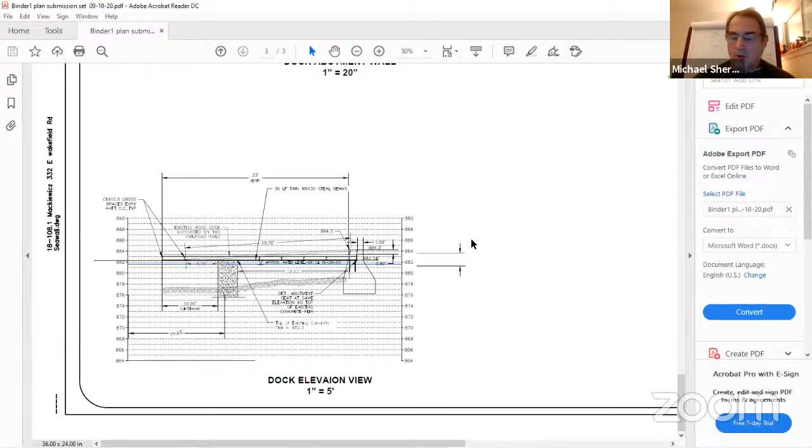That's something, Michael, that we could have on our next set of plans - pictures of what that is. We had that on another one, and then it's clear to us what the dewatering is going to entail and clear to the contractor of what is required. Would you be able to provide that? I can provide you with a sediment and erosion control plan and give you details of the silt fence barrier, and we'll have a sequence of construction in there too.

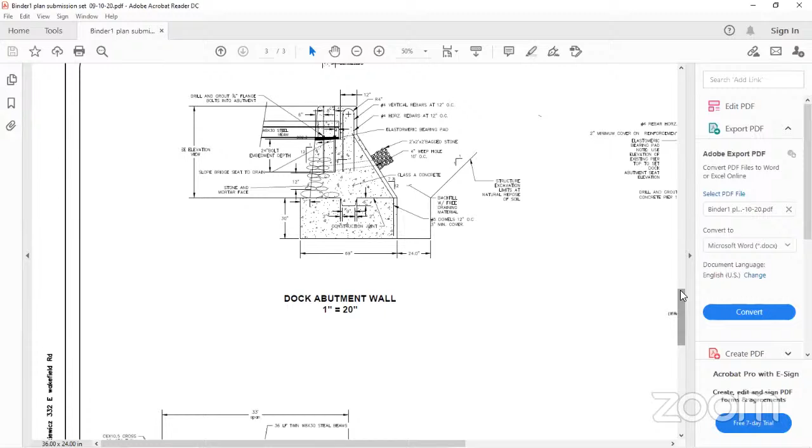What about the dewatering? I guess I was more referring to the exact specifications of your dewatering, to have that on a set of plans. Okay, that's fairly standard, right? It's somewhat boilerplate, not a problem. I can get that into you within a week. Okay, yeah, and I'd like to see it filtered, just so then everybody's clear as to what the requirements are.

I'll tell you one thing that Dave Batista mentioned that works really good - I've had a lot of experience with it on bridge replacement jobs we've been doing. It's a thing called the dirt bag, and it's just a big bag that you put your dewatering pump into, and that catches all the sediment. It's kind of like a silt fence.

Yeah, if you wanted to use that method, just have something spec'd out on the next set of plans. With whatever system you decide to use, just so we have it, so Brian has it as a spec. No problem.

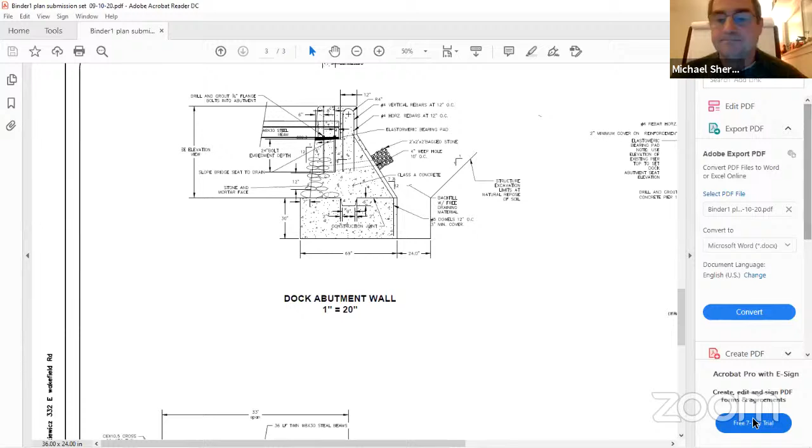Do the commissioners have any other questions, or anything else they want to see on this plan, before we move to approve, or accept, this? Are there some other details that other people would want to see?

Mike, can you talk a little bit about the construction sequence? Yes, I can go back to my picture here if my screen is shared again. There we go.

We'll have to enter the site from the existing paved area here, which there is to be a construction entrance built. That was part of our previous application, and that was to go right on this left side. The equipment will have to enter the property through this area.

The first thing we do is wait for the drawdown to get to its lowest level. Then we start the excavation and removal of the existing wall. The machines will work from the land side out to keep the machines out of the lake bed. We'll excavate the whole wall, stockpile all the material we're going to keep, and remove any material we're not going to keep from the site.

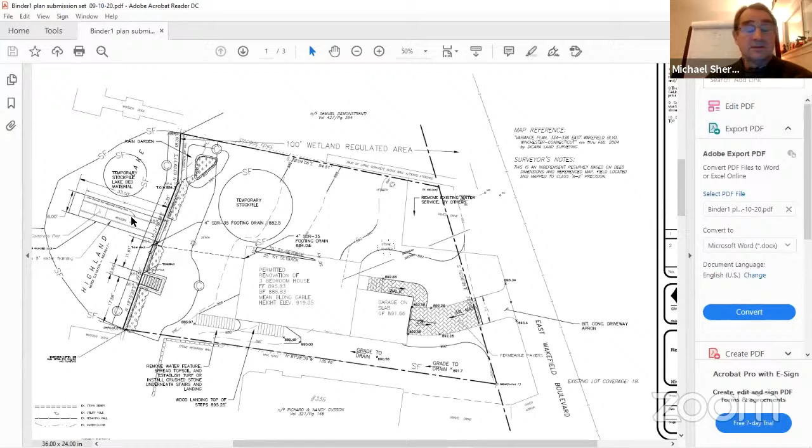And then we'll bring in the dock down through here, and I think we'll have to end up sliding it out over the lake. The dock's gonna be pretty heavy, and we really don't want to have a crane set up down here to put it out there, because those 8-inch beams are 30 pounds per linear foot, and at 33 feet long, that's a lot of weight.

Tell you how much it is. Yeah, it'll be close to 2,000 pounds.

So you wouldn't be able to get an excavator to swing it out there, but you could get an excavator to roll it out. We can put rollers on the bank and roll it out, and possibly just lift up the other end and pop it on top of the pier, then roll it out the remaining way. That's going to be one of the biggest challenges of this job, getting the dock out there.

Is there any request for boat lifts or anything like that? I don't see a narrative, and the application doesn't include anything for that. No. And we didn't call out the littoral boundaries on this, but they're just straight down through these property lines on the end. You can see the neighbor is definitely within his littoral boundary, he might even be over the property line at the end of his dock. But this dock, replacing it where it is, doesn't infringe on the littoral boundaries at all.

And there's no attempt at this point to request a boat lift or anything of that sort? No, I asked George, and he's not interested with that at this point. No, we're not looking for any kind of boat lift, even though, like you say, the activities on the lake, with the wave boats, are creating more demand. But right now we're not requesting that at all.

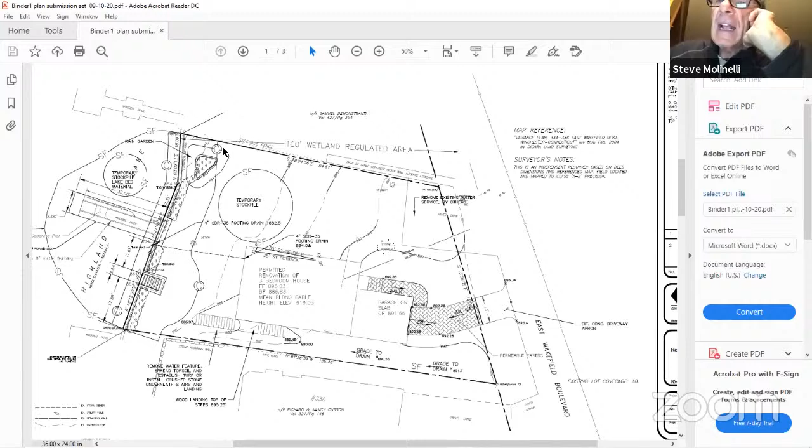Sure, I'll revise the plans to show that. It's not a big deal, it's just a matter of scaling it out and giving us two numbers, one on either side of the dock to the littoral boundary. That'll eliminate any questions down the road as to where the dock is being positioned.

I think we had these on here because of John DiCara's original map. I think he showed those, and I think I might have accidentally turned the layer off. So Mike, I got questions.

This application is, you're not modifying, you had an application before the commission back in '19 for the demolition of the house. Are you only... is this site plan, it doesn't include some of the things you had for the demolition and reconstruction? We showed what the proposed stuff was in here.

We still left it on. I screened out the house and just wrote 'permitted renovation of 3-bedroom house' to remind you that you guys have seen this before. But like the gabion wall, that's still there. The roof leaders are still discharging into that rain garden.

Like the only thing you're talking about here is the dock superstructure, right? So the other, we're not looking for permitting anything beyond this cut line right here and that temporary stockpile. What's that? Say that again. I'm sorry, we're not looking for approval of anything beyond this cut line and the temporary stockpile. That's what we're asking for.

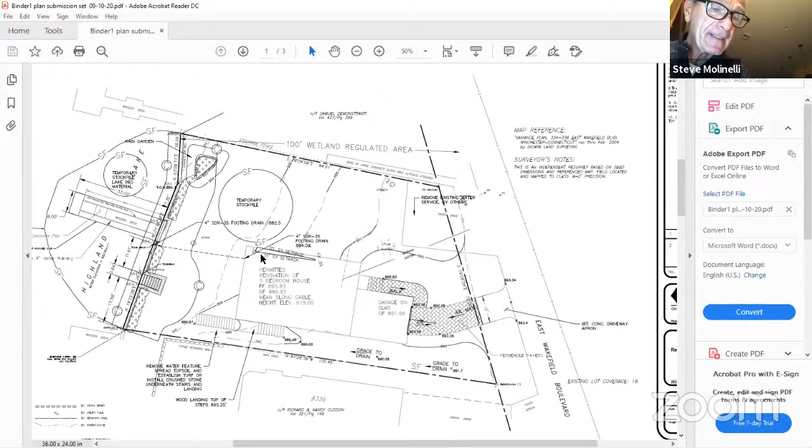That said, do we have any additional questions from our commissioners? No, I think we're pretty good. And we're in agreement, or I'd like to discuss the significant activity portion of this before we speak about accepting the application.

A lot of blank faces here. Are we in agreement that it's not significant activity, that would require a public hearing? Okay, well, then that's that. I'd like to make a motion to accept application IWWC 20-44 as not a significant activity.